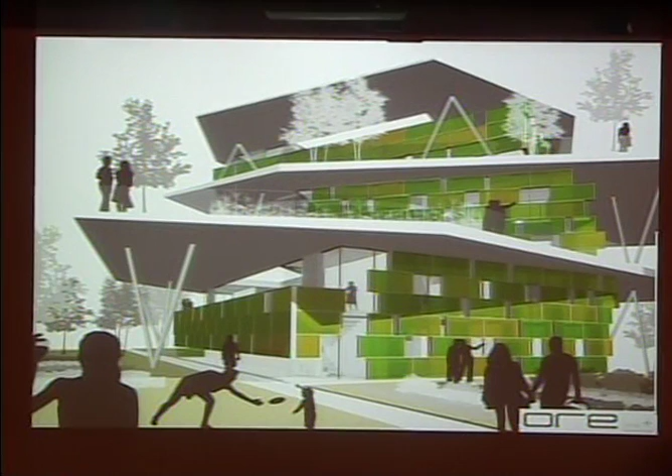This is the project as modeled. It's a housing unit—you can notice it's got a green enclosure. This green enclosure is actually a second skin of aqueous algae panels. On the left-hand side there's a flow diagram: algae flows through each of these modular tanks, and as it flows through, it's being starved of oxygen and of sulfur.

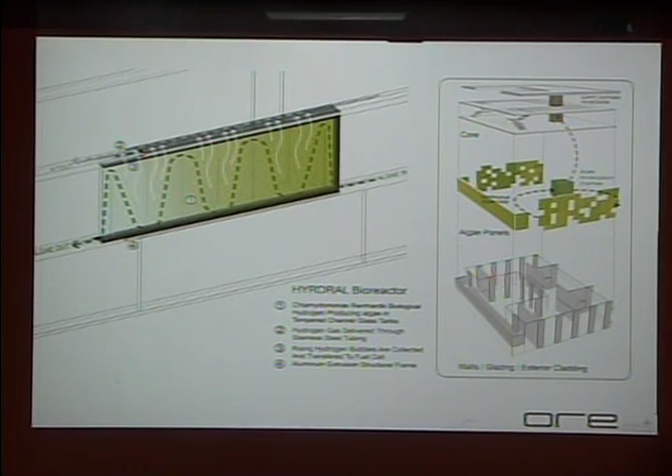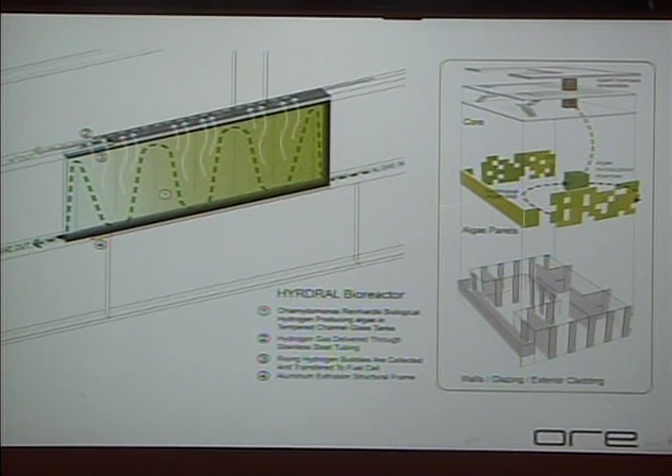This effect was actually discovered in Germany in 1912, and has been continually researched since. It's 100,000 times more effective now in terms of hydrogen rate or production rate than it was in 1912, but it's still about 5 to 10 years away from being market feasible. When it's starved of oxygen and sulfur, instead of producing oxygen, it produces pure hydrogen, which in this model we are farming at the cellular level—cellular being the building unit cells. We transport that into a containment area in the basement, which burns it for power and heat.

This is an image we found striking when we came across the research. Back to ore and its name—ore really came into being, I think, with this project, or first surfaced with this project, because this was a raw potential we saw. I worked with another student named Tyson Gillard on this project, and we saw in its raw research form a potential to gain energy with.

But then we thought about how beautiful, especially in Manchester where the competition took place, and what an impact this chlorophyllite green would have as a skin to a building. The light would just wash through, and how psychologically calming that'd be in a real dense urban environment. Manchester is the birthplace of the Industrial Revolution. It has like 6 trees, it's very dense and full of brickwork, so they're putting an initiative in to bring more green, and we thought this was a very applicable solution.

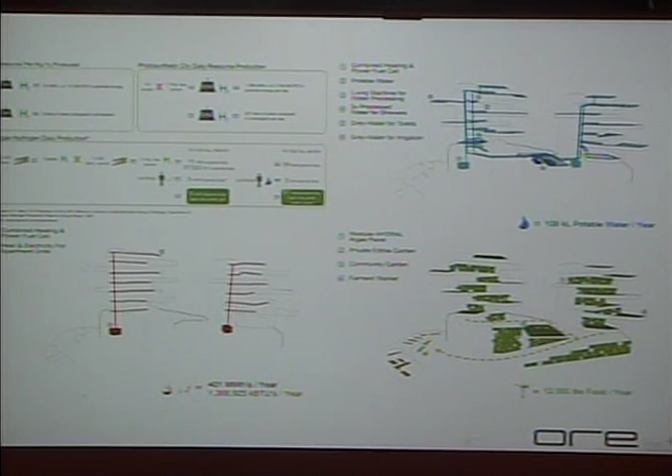This is it as a neighborhood block. This is more site specific, because this is actually in Manchester. It's a big parking lot, and they wanted to have public plazas that were reachable and had some inflection to the urban spaces.

This next project actually started at U of O as well, when I transferred up to the Portland program, but Jim Pettinari was the program director. It was for a seminar to do urban furniture, and I thought urban furniture had already been taken care of—there were plenty of lights and park benches and whatnot.

But what I saw in Portland was there was a lot of garbage in front of our building and every building down there, because homeless people needed it to sleep. It wasn't something they could just pick up easily and take with them—it literally was cardboard or newspaper stuffings. Every morning after a late night in the studio, we would emerge from the building and push our way through this garbage. I thought, why don't we come up with something more convenient for everybody, especially a person who has to find shelter at night.

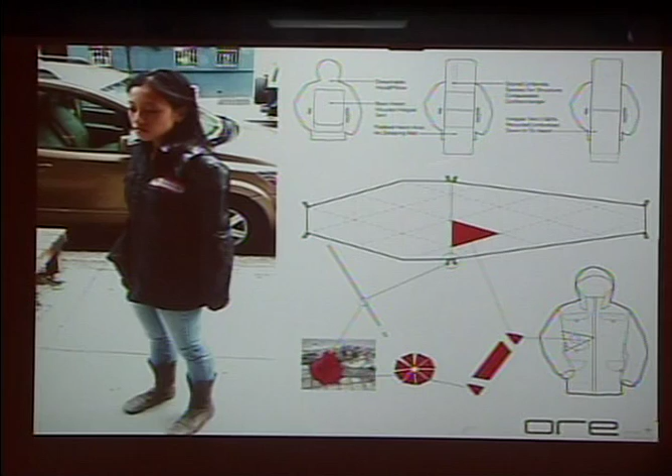So I started thinking about a jacket that would convert into a tent, supplying shelter, but also having padding in the back, so that when you unfurl the back flap you would have your own bed, and then it goes over and protects you from the rain and the elements. Just a single person tent, lightweight.

You're seeing umbrellas in this because this is the next evolution. This is literally the next year after I graduated from U of O in 2005. I flew to New York, and what I saw going back was hundreds and hundreds of these everywhere. We don't use umbrellas here in the Pacific Northwest, so that was a bit of a culture shock. But also, they have disposable umbrellas that are $2 to $4 at bodegas, and they only last one hard rain, then they turn into that. After a hard rain I would come out and see the streets littered with what looks like crash-landed insects. I started thinking, that's a tremendous waste, and what could be done with that?

So that's my girlfriend, actually. I somehow convinced her to come with me and pick up about 40 of them after a hard rain, and we washed them right away. Then we stripped the fabric from it into these triangles, and we were able to reverse the triangles on themselves and make swatches of cloth. I did some very rudimentary drawing and pattern, since I'm not a seamstress by any means, and we took it to a seamstress who put it together in a couple of days for this prototype.

About the same time, I moved to New York. Literally the day I moved, a friend of the family, who coincidentally is director of the open space greening program for Grow NYC, a nonprofit which takes lots that were burned down during the 70s.

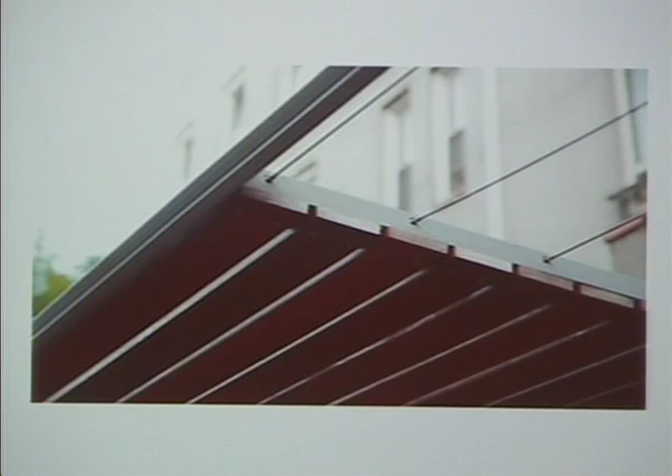Landowners in neighborhoods that were so bad burned down their buildings for insurance money, so there are all these sand lots that the community now has access to because the cities turned them over for their use to beautify. This happened in the 80s, and some of them sprouted up and gained money. This one, I think, is a little before a lot of people's time.

If you've ever seen the Steven Spielberg movie Batteries Not Included, it took place here. There's actually another garden right behind it which split the money, or was supposed to split the Steven Spielberg money, with this group.

Now these are all market rate apartments in the Lower East Side, which have become very expensive, and this is all Section 8 housing, public housing. The way the cards fell, this garden somehow received all that money, and it became literally like a landscape garden to rival Capability Brown. It's got follies, fountains, arbors, and rose bushes, and this is how I found this site 10 years after the money had been awarded.

Gerard Lordahl, the director of the program, was showing me around because it was my first time in New York. He showed me this and said, 'We're trying to raise money from corporate donors, but we don't have any materials. Would you like to make some sketches, and maybe we can raise money to develop this property?' So I came up with some sketches.

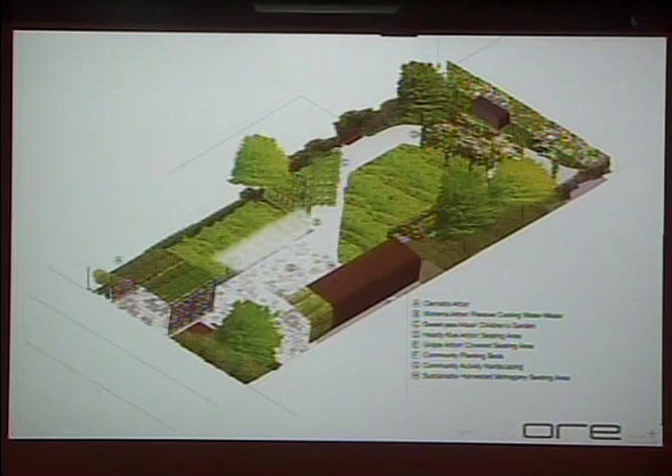Hot tub didn't make it. But with this extensive laundry list of items, we looked at it—if we give them a huge paved area, we won't have enough growing space. So we started taking the growing space and making it vertical, aligning it around circulation so you could have shade where people could sit, and more sun where the growing beds would be, which actually resolved itself quite nicely.

This is another image of it, and this is the opening day before any plants were up. This is salvaged mahogany, and this is off-the-shelf steel that we had rolled and painted.

This is basically what they do in the garden 24/7 when the weather's good—they have enormous cookouts, and it's a lot of fun. This is another view of the covered seating area. We made this little trellis specifically for a 20-year-old grape vine that had been there since Batteries Not Included. And this is a view of the covered seating area in the back.

We convinced them by explaining that this would be a visible barrier from their dance floor to the garden behind, which it successfully does without being 30 feet tall. And this is it today.

The same group, Grow NYC, was very happy with the pro bono work. Years later, coincidentally, right as I was starting ORE, they came back and said, we have a client for you. That client was ARE, Alexandria Real Estate.

They're an international corporation which does lab space. This is in Manhattan, essentially Murray Hill. There's the East River here, this is First Avenue, this is 29th Street. Bellevue Hospital, if you guys have been there, is right here. They had a stalled site.

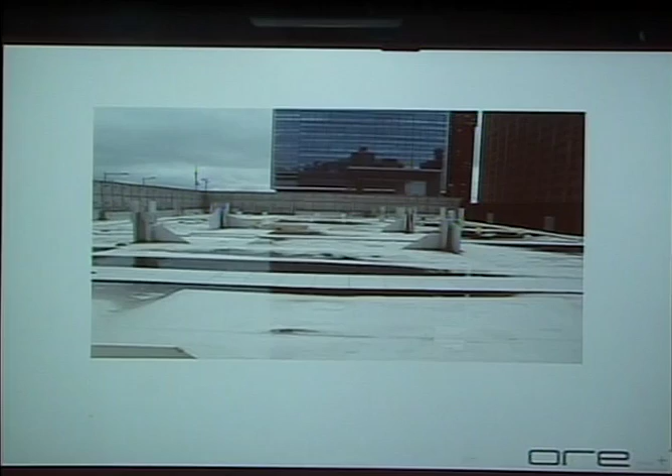We came up with a concept. Being that it had to be moved, we were resistant to the model used in Brooklyn. I don't know if anyone's seen Brooklyn Grange or Eagle Street Rooftop Farm—very beautiful farms, but they're permanent applications. They just lay down their drainage mats and then six inches of soil, and then they start planting.

This wasn't an actual roof—this is a floor slab that had a temporary membrane on it. But two, it had to be moved potentially in a year, potentially in two years. So we thought about a system that could also be recharged. Essentially, when this is harvested, you could go into the back of the house and grab one that's been growing and bring it back to recharge it, since this is a big public face.

So we came across the milk crate. Seems like a very easy answer now, but it was, like I say, a week of thinking about what would be perfect—whether we build wooden crates, whether we do this or that. And then we thought of this and we're like, oh, that's too simple. So we looked for further solutions, but always came back. The milk crate was the best.

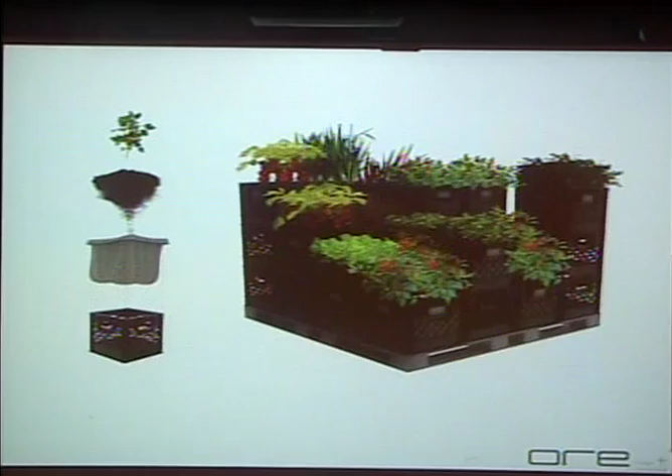This is the idea, essentially. We are prefabricating using the same seamstresses we actually used for the home free jacket. We're prefabricating a landscape sock of a 15-year rated weed barrier, which has great oxidation to roots and also retains water nicely. And then this is it, executed.

So these 6,000 crates were all transported actually in two days. They were grown off-site just because the DOB was very resistant to us taking down that fence. So these got very large, and the farmer was getting very nervous about transporting them. When he transported them, the tomatoes were actually five feet tall.

This is it, last year, and they wanted a little dining area too. That's the dining area, and that's at night. We were able to take advantage of a couple things from lighting design—one, that this is a kind of natural place to illuminate at night.

When we placed these down, we placed them on salvaged pallets, because we wanted them to sit even lighter and on the site, not obstruct any of the drainage, since they had a real drainage problem. This created a nice little opportunity for a light cove to wash the plants, or wash the pavers. This, like all of our projects, is 100% LED lighting.

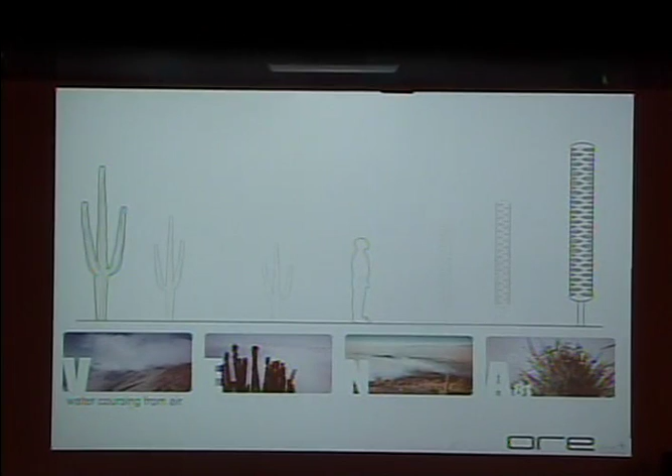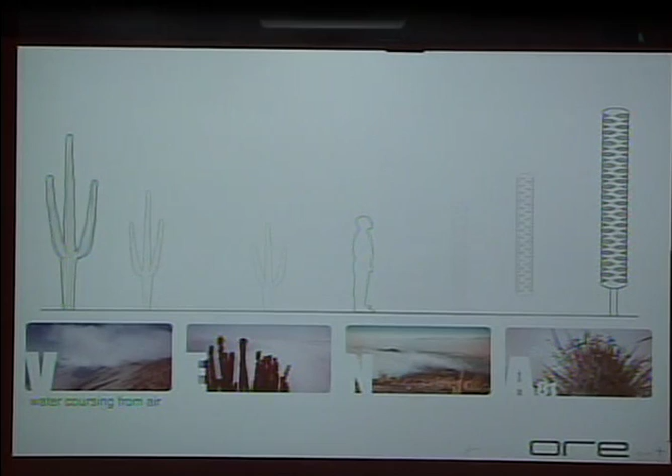A way to do what the commercial units would be doing, which is, of course, cooling the air so that it drops its water. The hotter the air is, the more water it can carry. So the idea was to think of a way to use natural elements, possibly as the heat sink.

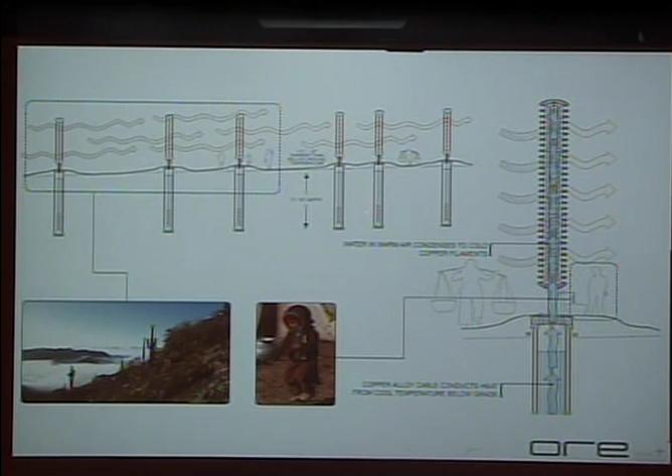This exoskeleton you're seeing is serving dual purpose. It's a ceramic high gloss series of discs, so it's stackable. So if one breaks, you can replace it, but you can also make certain adjustments—we call these Vena, a Latin root for water and coursing water. You can make Vena taller based on microclimatic elements, as well as a deeper well, for instance.

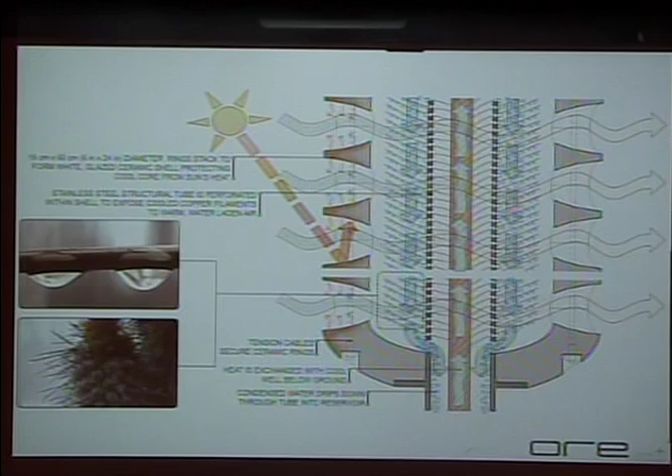But it also serves as a wind scoop. So it channels the air in, the air then circulates. As it's chilled, it leaves this water behind, and then it goes on its way. This is a visualization of it—kind of an international-looking village. It's actually Bolivia in the background.

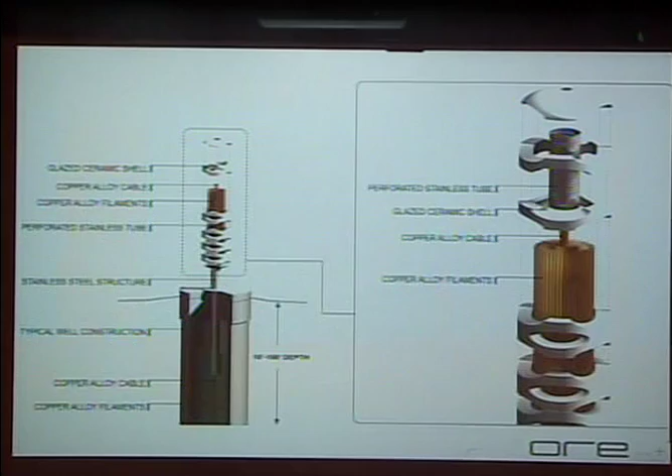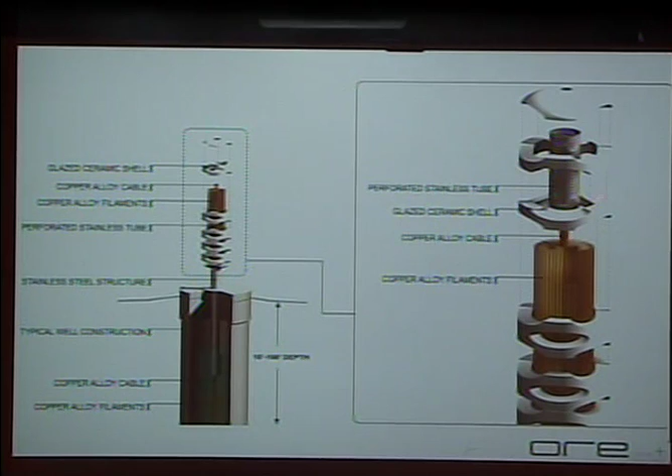And this is another visualization, so you can see that the copper alloy unfurls below ground, which gives a certain surface area exposed to the cool below-ground temperatures, which then balances and cools the above-ground copper alloy filaments, which again unfurl and are protected by this stainless steel perforated tube. And this is that ceramic shell I was saying—it protects the interior from heat gain and also serves as a wind scoop.

Marty, we just found out we did not get the grant, unfortunately. But we're still in the running for a couple other grants for this. We have an NGO in Kenya who has been working with us to raise grant money to develop the first working prototype and take it to test. We were scheduled to test there this August, but we're probably going to have to delay it a year. Hopefully less than that, but it's definitely our main concentration at this moment with funding—getting this up and running before the algae and before the other projects, although they're all slowly working on their own too.

This study of Kenya found that based on the climatic conditions—the relative humidity and the heat differential between above and below ground temperatures—we have the potential to produce 8 to 10 liters a day per unit of fresh drinking water, which is a huge impact. And these are meant to be sold from anywhere from $5,000 to $10,000 per unit.

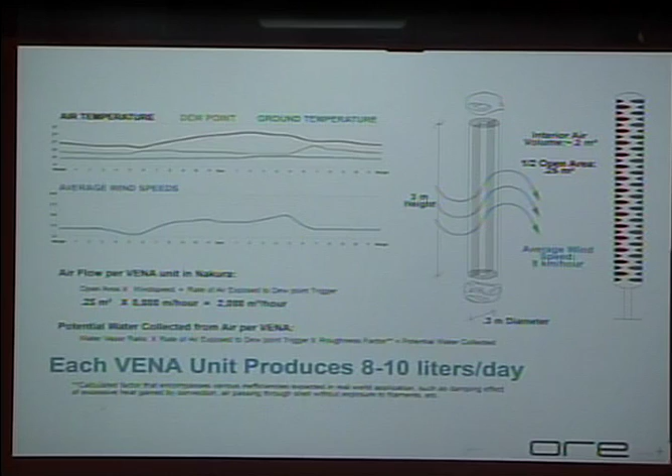Since they don't have any moving parts, they don't require electricity or coolants. The life expectancy without vandalism is very long, so it's an investment that we think is very worth it for NGOs and possibly UN.

This is the Sandstone Road project that you mentioned. It was the first place winner at the Incheon, Korea International Design Awards.

My first studio in 2009 was in an area of Brooklyn called the Gowanus. It's one of the most polluted waterways in the world, and it has not only pollution in the water, it also has a lot of industry around it.

What was great was that I got a really cheap warehouse space converted into an office. What wasn't great was that it was next to a giant cement mixing complex, with trucks rumbling up and down the street every day, creating literal waves and ripples in the asphalt, like you've seen on bus malls. It really exposes how non-sustainable, not even speaking environmentally, but just how weak a material asphalt is, which added to my hatred of asphalt.

So I went and decided to find some facts about why I really hate asphalt, and I found quite a few health facts, energy and oil consuming facts, urban heat island effect facts, and rising cost facts - why this shouldn't be as ubiquitous a material as it is today. What's particularly scary are the carcinogenic fumes which off-gas from it when it's 75 degrees and warmer, being that it's in front of every one of our houses.

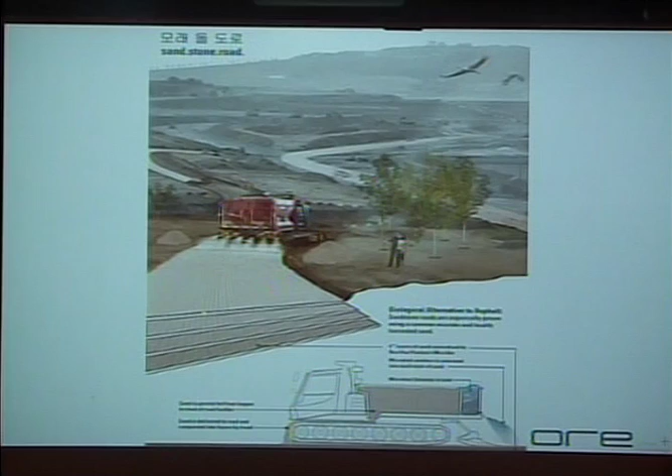Currently these are 4-inch layers. We were talking with some people in this research area, and 12 inches would suffice to drive on. The curing time at the moment is the limiting factor as to why this isn't already a technological revolution in how we create streets. You can create pedestrian pathways, no problem, but at the moment it would take months for this to cure before traffic could go on it. But that is changing - it's getting faster.

And this is, of course, the image of the new world paved in sandstone, with all the health benefits and cooler urban heat islands.

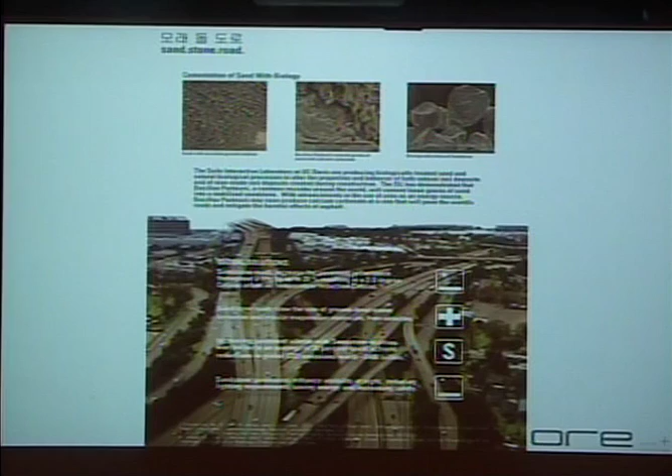We do a lot of industrial design too, as kind of fun projects, and we try to tie it into our work as much as possible using salvaged materials. This is an idea we had when we read about the 80 or so subway cars decommissioned from the MTA, the Metropolitan Transportation Authority in New York, every year, stripped and then literally dropped off barges off the coast of New Jersey and Connecticut to create artificial reefs.

We thought, well, what happens to the material? Does it just go to the scrap heap? Is it melted down? What is it? Is there an easier way just to modify it slightly and reuse it, possibly for something for transportation? You see where I'm going?

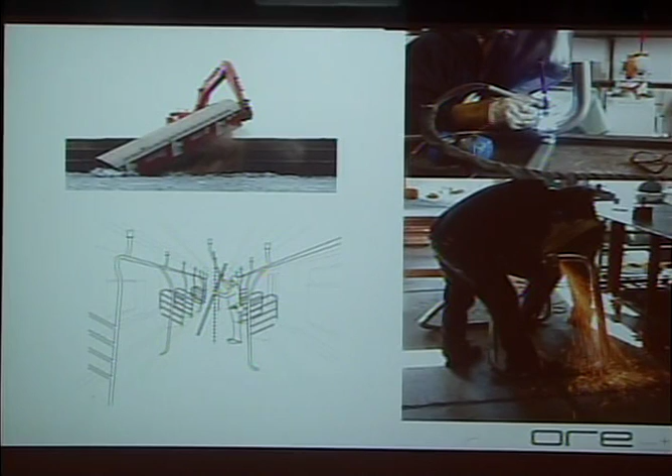So we got our hands on some raw material, and this is actually just cut and fabricated as the prototype. This is the bike rack we created - it'll hold easily 5 to 6 bikes.

For the photo shoot, we thought one was nicer looking, but it's a continuous knot which provides two areas of locking at any angle. We're actually speaking with Albina Metals, which are out of Wilsonville, Oregon. They have a machine that can make these with one piece of metal and one weld.

They have a 3D CNC bender, so they told us they could do it for a very good price. So I think we might take this to market soon.

We weren't actually thinking about the LA River specifically, but we've been toying with technology using wave energy from the ocean to desalinate seawater. So the seawater, or the sea itself, would power its own transformation into fresh water.

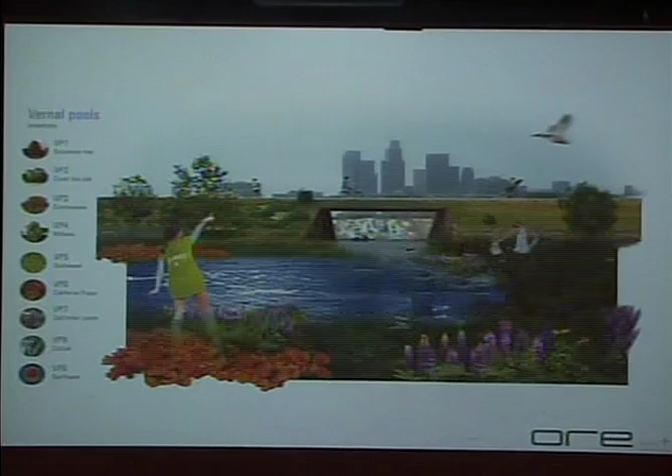So in all the green areas here, we propose just creating micro-perforations along the LA River with the effect that not a single drop of fresh water will reach the ocean. It'll all be stored along the edges, which are not populated. They're actually highways and easements, so they're already green, but they have this big barrier here, and we're proposing to create an opening and then allow them to flood.

With that being said, we have a portion of the LA River which would be dry as a bone all year round. We propose to create a dam right here, to keep the seawater from flowing back in once this is dry.

And then we are proposing a series of pumps. These pumps, of course, are just like a bicycle pump, have a pontoon on the top. When a wave goes by, their action goes up and down. And just like a bicycle pump, they pump seawater into this area which has been made empty by these vernal pools.

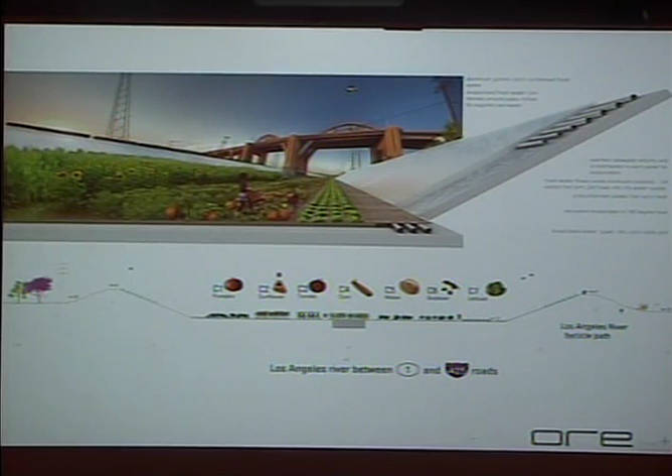They're pumped through a system of polycarbonate trombe walls. And the trombe walls, of course, as we learned in ECS, are a way to capture and use heat energy from the sun. These top pipes, for instance, are the supply coming directly from the ocean. They're about 50 degrees Fahrenheit.

They span all the way down and then they return. As they return, they reach a temperature running through these trombe walls themselves somewhere between 70 to 90 degrees Fahrenheit. And as they're warmed, then they drop their water into the trombe wall. The trombe wall could be anywhere from 120 to 140 degrees Fahrenheit, causing evaporation.

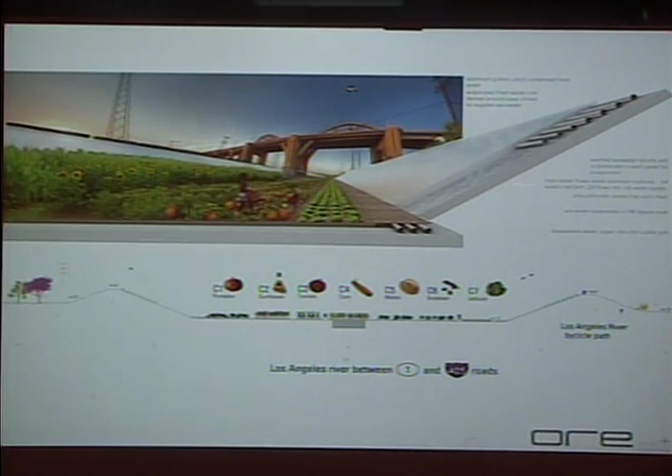That evaporation of the seawater then climbs with its hot air and engages or comes in contact with the supply of the seawater, which is, of course, encased in piping, so it doesn't literally come in contact with the seawater, but with a cold piping, where it condenses and drips into gutters, and then is gravity fed into the infrastructure, some of which can be diverted into a farm.

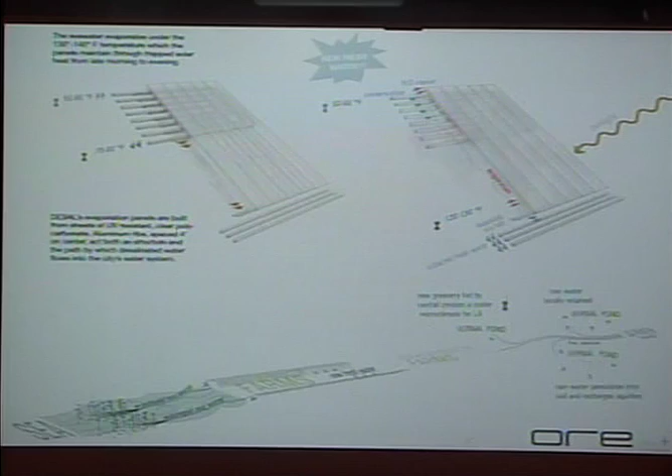Because we figured we had all this dry space, let's create local agriculture. And this is essentially that diagram, showing how it works.

This is our visualization of what the LA River could be.

It's kind of a portion now where we're going to go far into the future. A lot of our commercial work keeps us in business and keeps us sharp, because we constantly have to prove what we say. But we spend a lot of time looking at projects like this, which was a proposal for infrastructure in the UK for 2050, and that rang, that was music to our ears.

So we started looking into technology. Essentially, it was a competition to replace the current day high tension pylon. They have 83,000 of these throughout the UK, made of steel, which no matter what kind of coating you put on it, is slowly rusting. They are getting tired of replacing these, and they realize it's entropy at work, and it's a losing battle. It's better to come up with a solution now than have to replace them over the next 50 years. So they put out a call for entries of new materials.

We started looking at a technique in Japan, which is still in the laboratories right now, just budding, which is to convert CO2 into carbon fiber. And we suppose that by 2050, this would be at a level that we could actually use as a building material.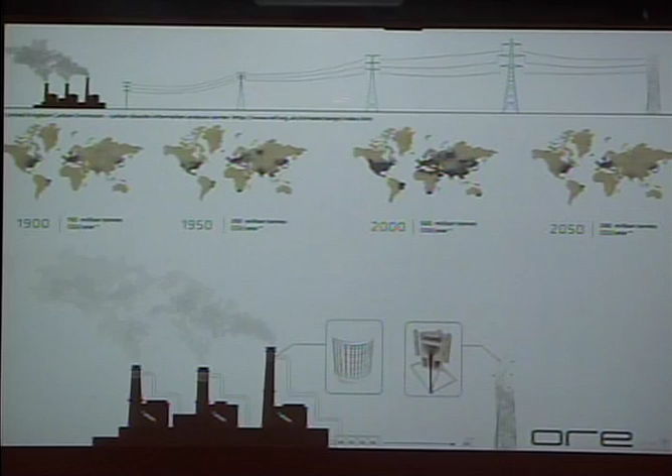So our design was to take, and we figured that the UK's natural resources are still coal, quite a bit. Over 60% of their power still comes from coal, even with all the wind farms. That even by then, we would still have a certain amount of coal being burnt. We could use the off-gassing of the CO2s, and we could scrub it from the air and turn it into a building material, so that the energy being produced and transmitted along these lines would actually be building its own infrastructure, growing its own infrastructure from carbon fiber.

We also suppose that by 2050 we would have robots that could act as spiders, essentially, to manufacture these. So we created an algorithm to spin these, not totally based on spiders, but based on what we thought was kind of a sequence of spinning, simplified in this direction. So this is the carbon fiber pylon.

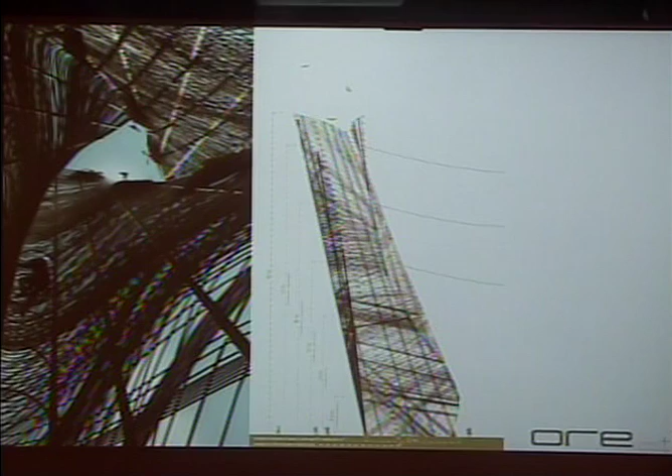We have a single light source at the base, rather than having a light source up here, for a variety of reasons. What we wanted to happen here was that you would have about a 200 watt LED disc, which is a very bright LED disc, that would wash light up in the interior. We wanted that single source to also transmit, almost like a fiber optic, but we didn't want this to be solid because that would be an extreme amount of material to use. So we started thinking, how could this happen?

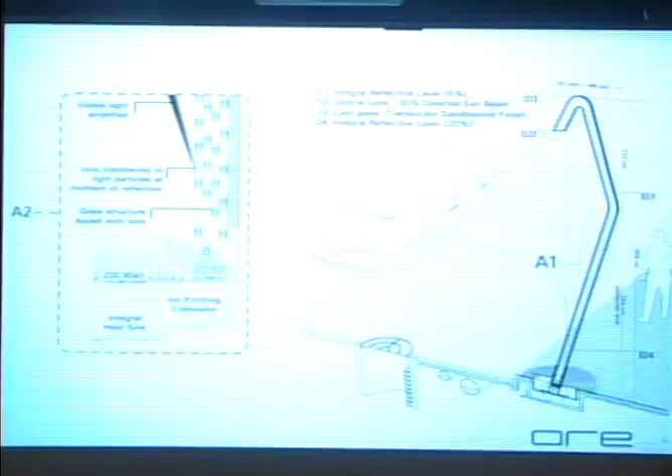This is what we want - how could it work? So this is a section diagram of what we wanted, and this is essentially showing the research that we found. We went back to 1970s lasers and how they were able to amplify light in the beginning. It was very, very simple - well, not simple to us, but to the laser industry now, it was very simple machinery.

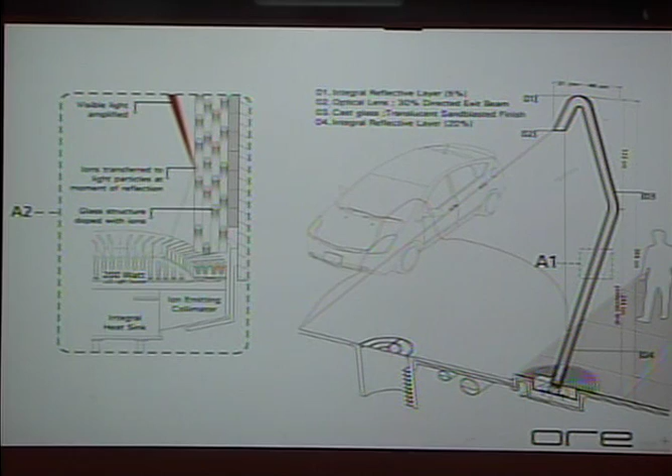Having an ion emitter doping glass was one way that they could increase the amplitude of light. Every time the light would encounter an angle of incidence, or refract or reflect through this ion doped glass, it would increase in amplitude.

So we thought, well, our glass revolution isn't only that it's a stronger glass, so we can do a tube shape like this by 2050, but this disk, which is producing visible light, is also producing invisible ions, which are doping the glass all the way up, essentially being like a laser pump, so that you have this light under our control all the way. So it increases amplitude. We still have a high output out here.

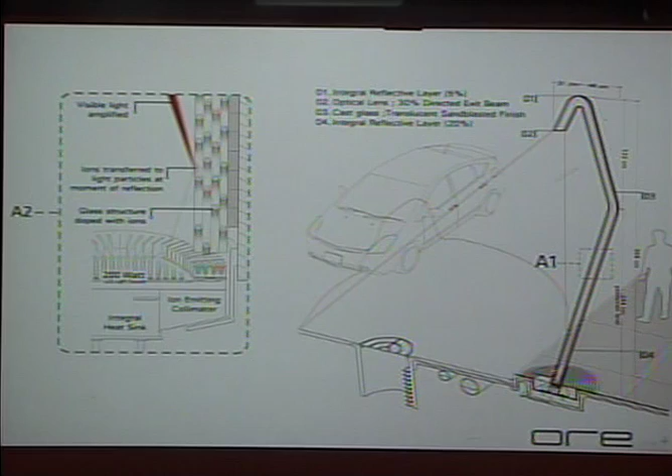So this is in the works. This is the first time we're showing it. This is a commercial project we're working on at the moment. This is the end of the presentation. Just kind of showing what we're working on in terms of the commercial side.

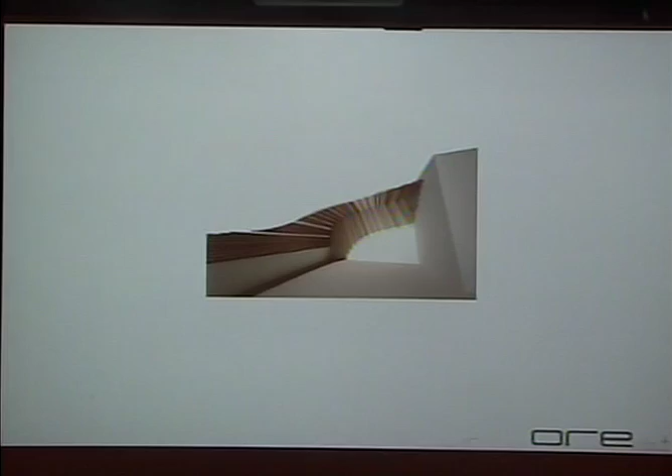This is a penthouse rooftop that we're doing for one of our clients for their private house in Chinatown. They came to us saying they wanted a tea house on their terrace made out of a water tower. We thought, okay, we could do that. That's great. We visited the terrace and said, where's the water tower? And they said, oh, it's not here. We don't have a water tower. So we thought, it's going to be extremely hard to get a water tower up here, and it doesn't really make sense to create a fake one if there's no water tower.

So instead, we were able to compromise. We would use the wood from disassembled water towers, and we would create these screens, which would then culminate in a tea house here. They also have a fire pit, which they don't like their neighbors knowing they have. So we're creating these Richard Serra-esque screens out of salvaged water towers in CNC'd profiles.

We are currently talking to the mayor's office in New York. As part of the client whose penthouse you just saw, part of her firm has asked us to do a proposal for the biggest armory in the world, which happens to be in the Bronx. It's the Kingsbridge Armory. It's been not an armory for 60 years, and it's been empty for 15 years. There have been many proposals of what to do with it. The communities actually had almost full control over what's going to go in there.

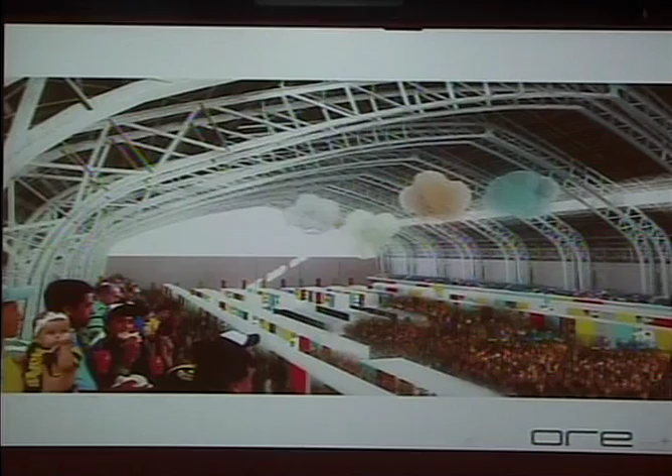It's 600,000 square feet, and the RFP, the request for proposal that the city put out, was trying to find a financial package that made it convincing that it would be a viable business venture, because they don't want to just give it to somebody who's not going to survive. So putting the program in, we decided that the main drill floor, this amazing space with a 110-foot ceiling on the interior, needs to remain open and unbuilt.

We're working with MVRDV on this project. This is, I don't know if you're familiar with their tribunes, they do these orange staircases. They've inserted that there, which is going to cover an area for an anchor retail tenant, a movie theater, and a series of restaurants. That's not even all the way to the ceiling, that's only 60 feet high, you have another 50 feet above you. And then the rest is going to be incubator, market stalls, and soccer exhibition matches.

That's it. Thank you very much.